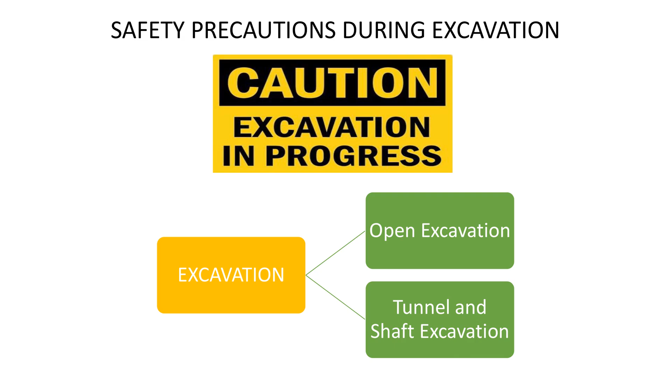The sides of every excavation where there is danger of fall or dislodgement of earth, rock or other material forming the sides or adjacent to any excavation shall be securely supported by adequately braced timber of suitable quality or other material unless the sides of the excavation are sloping to a safe angle.

No excavation of earthwork below the level of any foundation of a building or structure shall be commenced or continued unless adequate steps are taken to prevent danger to any person from collapse of the structure or fall of any part thereof.

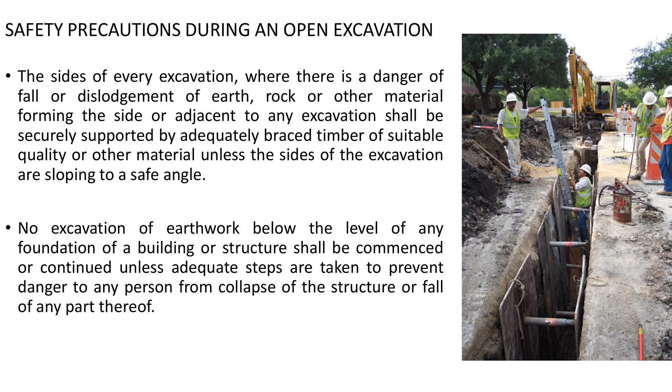In every excavation work along sloping ground, sides and slopes of excavation shall be maintained in a safe condition by scaling, benching or barricading. On steep slopes, workers shall not be permitted to work one above the other. Additional precautions are to be taken to prevent slides, slips or cavings when excavations are made in locations subject to vibrations from railroad or highway traffic, etc.

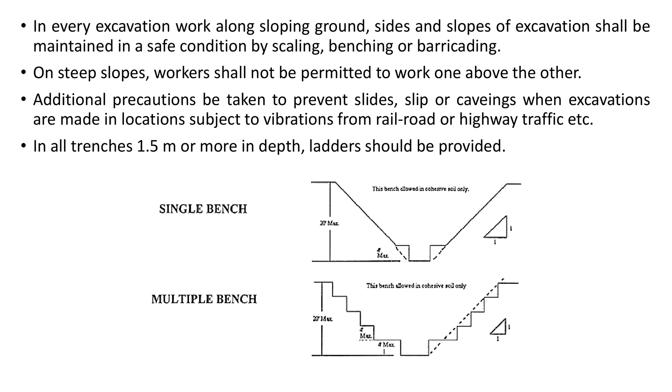For all trenches 1.5 meters or more in depth, ladders should be provided. Excavation areas should be adequately lighted for night work. During hours of darkness, all public sidewalks should be adequately illuminated and warning lights about excavation should be provided. A flagman should be posted to warn the public or approaching trucks and to direct the trucks in and out of the site of excavation.

The side slopes and their stability should be carefully examined after every blasting operation. For every accessible part of an excavation, pit or opening in the ground into which a person is liable to fall, a suitable barrier should be provided. Measures should be taken to prevent workers and spectators from approaching the dangerous areas.

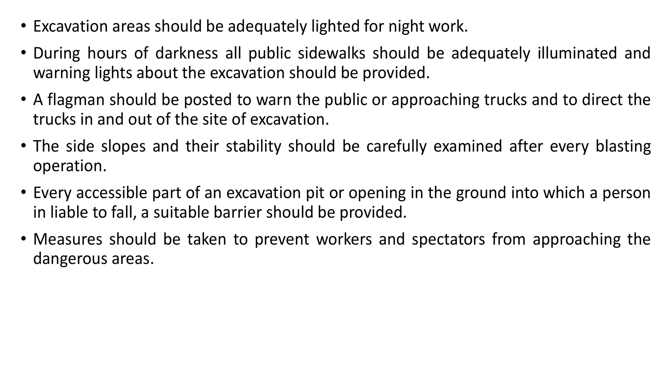Now we will look into some of the safety precautions that have to be taken during tunnel and shaft excavation. Frequent careful inspection of tunnel walls and roof and thorough scaling or removal of loose rock are necessary to prevent rock falls. Ample illumination, good housekeeping and safe walkways are important factors in the prevention of accidents. All persons working in or entering the tunnel should wear hard hats and hard toe shoes.

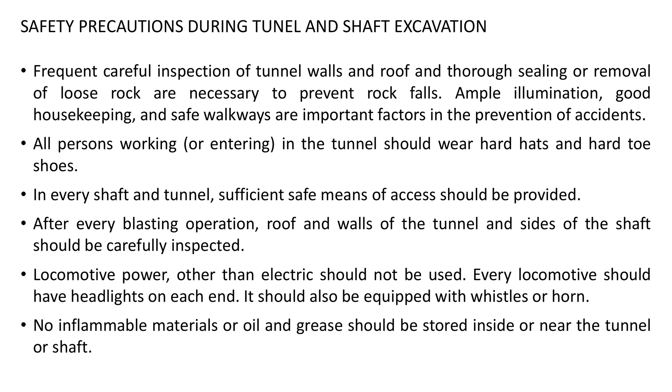In every shaft and tunnel, sufficient safe means of access should be provided. After every blasting operation, the roof and walls of the tunnel and sides of the shaft should be carefully inspected. Locomotive power other than electric should not be used. Every locomotive should have headlights on each end. It should also be equipped with whistles or a horn. No inflammable material or oil and grease should be stored inside or near the tunnel or shaft. The ventilation system should be adequate to maintain circulation of air in all parts of tunnels and shafts.

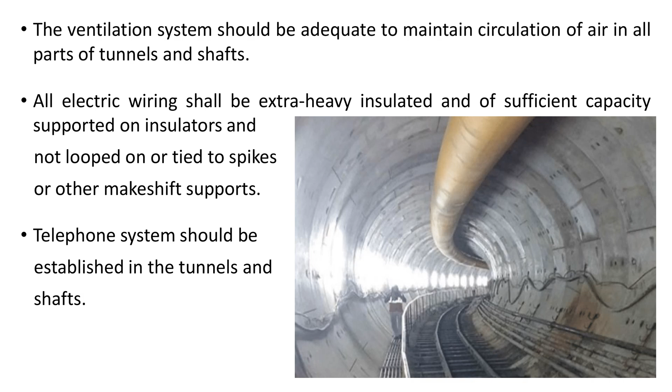All electric wiring shall be extra heavy insulated and of sufficient capacity, supported on insulators and not looped on or tied to spikes or other makeshift supports. A telephone system should be established in the tunnels and shafts. So this is an example of a tunnel opening where we can see the air being pumped inside through the yellow pipes for proper ventilation and cooling inside the tunnel.

Now we will look into some of the safety precautions that have to be taken during gaseous tunnel excavation. Regular checking of methane gas by methane detector. No entry for workers carrying lighters, matchboxes, etc. inside the tunnel. To detect carbon dioxide formation, safety lamps should be provided. The gas percentage should be checked regularly. Rescue apparatus shall be provided and some personnel should be trained to handle them. Welding and cutting by gas should not be allowed inside a gaseous tunnel.

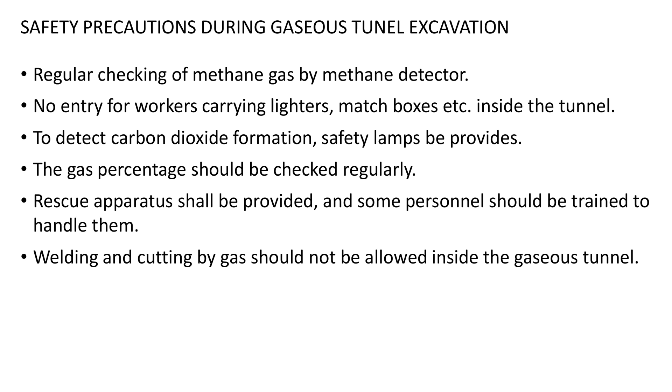Now, we will look into some of the safety precautions that have to be taken during drilling and blasting operations. We basically have 5 steps that have to be followed during drilling and blasting. They are safety during transportation of explosives, safety during storage of explosives, safety during drilling, safety during loading of explosives, and finally safety during the blasting operation. Now we will look into the safety precautions that have to be taken during each one of these steps.

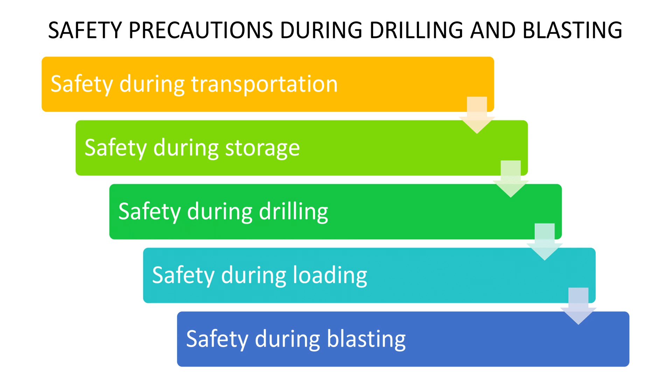Safety precautions taken during transportation of explosives. Vehicles must have springs under the body. Detonators and igniters must not be carried in the same vehicle with explosives. The vehicle carrying the explosives must not be used to transport workmen or other materials. Driver should not leave the vehicle unattended.

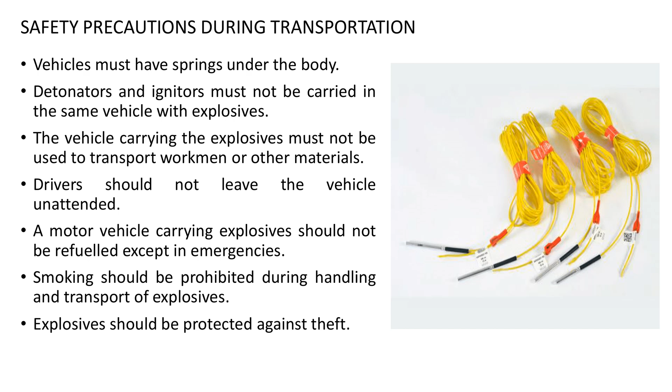A motor vehicle carrying explosives should not be refueled except in emergencies. Smoking should be prohibited during handling and transportation of explosives, and explosives should be protected against theft. All vehicles transporting explosives shall be marked or placarded on both sides and ends with the word explosives in white letters not less than 75 mm tall on a red background.

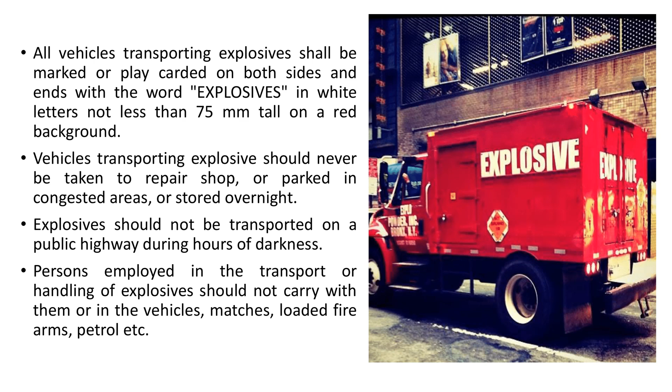Vehicles transporting explosives should never be taken to a repair shop or parked in congested areas or stored overnight. Explosives should not be transported on a public highway during hours of darkness. Persons employed in the transport or handling of explosives should not carry with them or in the vehicles items such as matches, loaded firearms, petrol, etc.

Now we will look into some of the safety precautions that have to be taken during storage of explosives. The place where explosives are stored is called a magazine. The magazine should be kept clean. High explosives like dynamite should be stored in a dry, clean, well ventilated, bulletproof and fireproof building constructed in accordance with the Indian Explosives Act on an isolated, well guarded place.

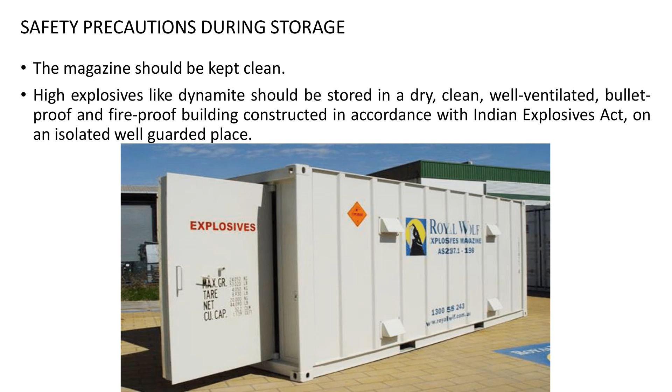A sufficient number of lightning conductors should be provided on top of the magazine. Separate magazine shoes without nails should be kept in the magazine, and persons entering the magazine must put on these magazine shoes. Light should be obtained from an electric storage battery lantern. No person having articles of steel or iron should be allowed to enter the magazine.

Oily cotton rags, cotton waste, and other articles liable to spontaneous ignition should not be taken into the magazine. Packages containing explosives should not be allowed to remain in the sun, and adequate firefighting equipment shall be provided in the magazine.

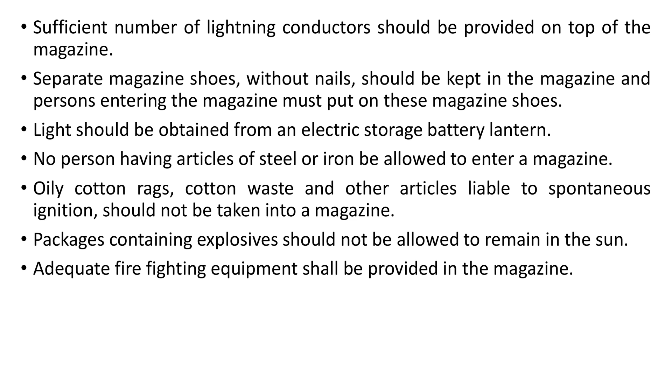Safety precautions during the drilling operation. Holes should be of greater diameter than the diameter of the cartridges of explosives. Loading and drilling should not be carried out at the same time in the same area. Drilling should not be resumed after blasts have been fired until thorough examination has been made to make sure that there are no unexploded charges which the drill might strike.

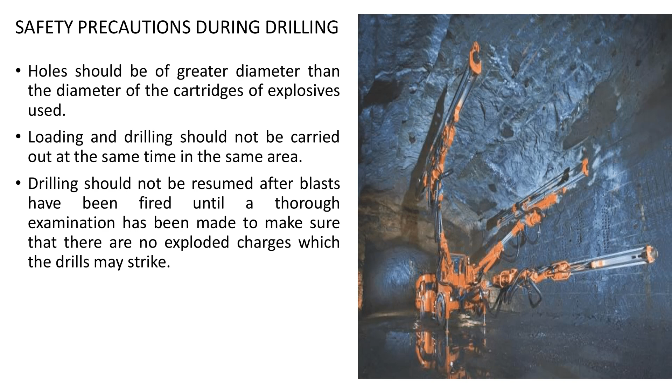Now let us look into the safety precautions taken during the loading of explosives. Boreholes must be cleared of all debris before the cartridge is inserted. All loaded holes or charges shall be checked and definitely located before firing. Holes in the cartridges shall be made with a sharpened wooden stick. Detonators shall be inserted only in a hole at the end of the cartridge prepared specially for that purpose.

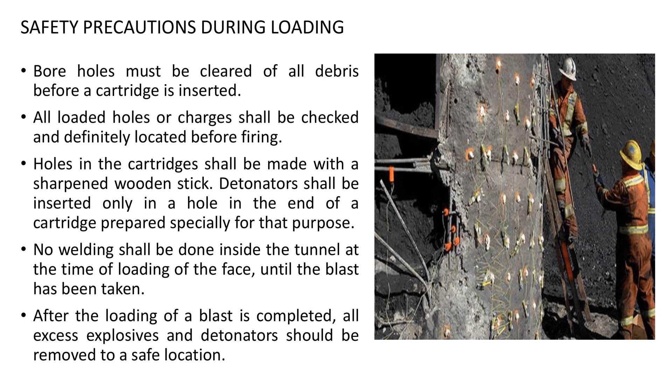No welding shall be done inside the tunnel at the time of loading of the face until the blast has been taken. After the loading of a blast is completed, all excess explosives and detonators should be removed to a safe location.

Now we will look into the safety precautions taken during the blasting operation. The charge should be fired successively and not simultaneously. Prior to the firing, all persons in the area should be warned of the blast and sent to a safe distance. Flagmen with whistles should be posted to stop traffic at access points on each possible route of travel. Blasting should be done at fixed hours and displayed on a notice board.

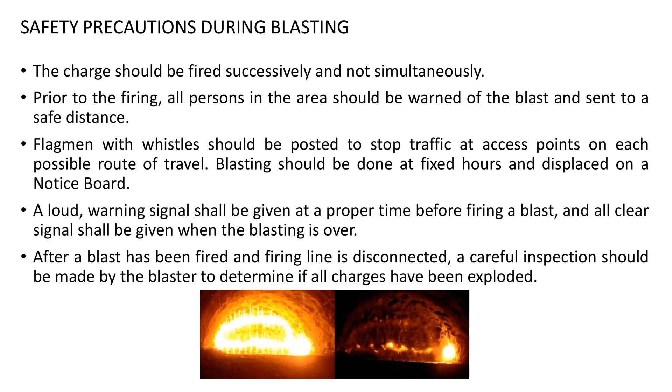A loud warning signal shall be given at a proper time before firing a blast, and all clear signals shall be given when the blasting is over. After a blast has been fired and the firing line is disconnected, a careful inspection should be made by the blaster to determine if all charges have been exploded.

Now we will look into some of the safety precautions that have to be taken during hot bituminous works. Workers shall use protective wear such as boots, gloves, goggles, helmets, safety jackets, etc. When heating and handling of hot bituminous materials is to be done in the open, sufficient stocks of clean dry sand or loose earth shall be made available at the work site to cope with any resultant fires.

When heating of bituminous material is carried out in enclosed spaces, a sufficient number of properly maintained dry powder fire extinguishers or foam extinguishers conforming to accepted standards shall be kept in readiness on the work site. Piping for hot tar and bitumen shall be adequately insulated to protect workers from injury by burns. Workers shall not stand facing the wind direction while spraying hot binder, as it may fall on them causing burns.

Suitable indicator gauges shall be used to check the level and temperature of the material in the boiler. Workers should not be allowed to peep into the boiler.

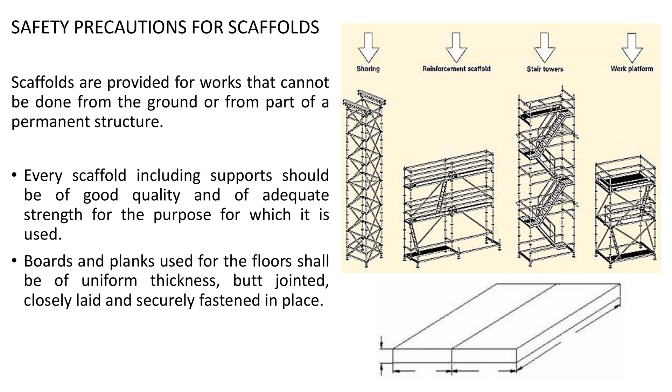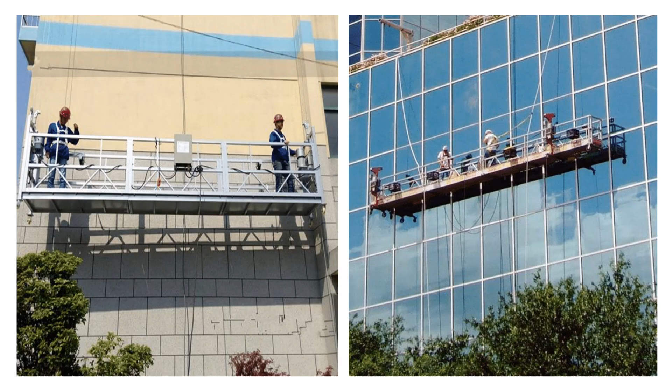In case of suspended scaffolds, supports should be of adequate length and strength. Ropes, chains, or other means of suspension should be of good quality, sound material, and of adequate strength and properly secured. Persons should not be allowed to work from scaffolds during storms or high winds. Side screens should be provided on scaffolds erected along passageways. So these are a couple of images showing suspended scaffolds, usually used for cleaning of glass, painting and plastering purposes.

Now we will look into some of the safety precautions that have to be taken for platforms. Platforms are provided on top of scaffolds, which act as a leveled surface for the workers. All working platforms from which workers are liable to fall more than 2 meters should be of adequate width, depending upon the type of work done, and provided with suitable guardrails of adequate strength. Platforms should be kept free from any unnecessary obstruction, material, rubbish, etc.

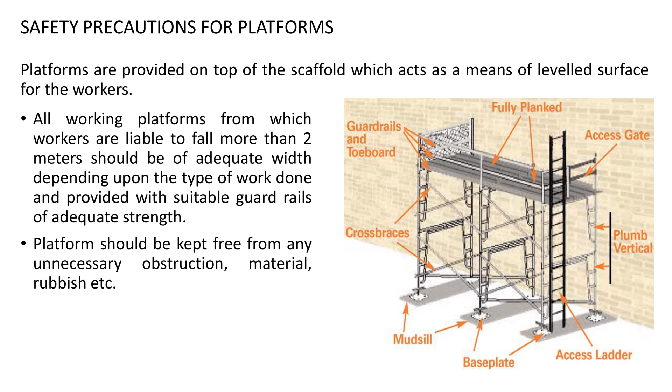Each supporting member used in the construction of platforms should be securely fastened and braced. Supporting members should be placed on a firm, rigid, and smooth foundation of a nature that will prevent lateral displacement. Cantilevering of scaffold planks should be avoided. Where planks are butt jointed, two parallel putlogs must be used, giving each plank sufficient support.

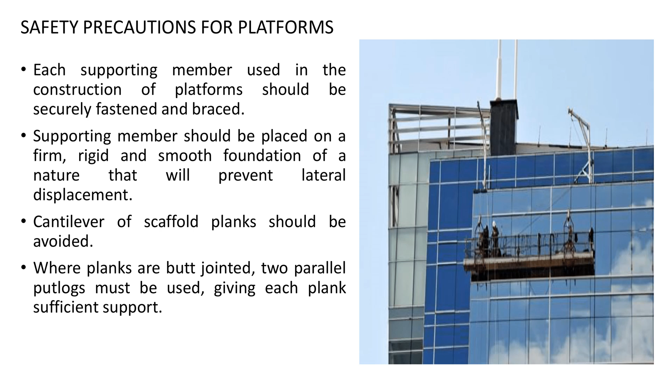Now we will look into some of the safety precautions that have to be taken while using ladders. Ladders should be of good construction, sound material and adequate strength. No ladder with a defective or missing rung, or with any rung which depends for support solely on nails, spikes, etc., should be used. Wooden ladders should not be painted, as paint covers up the defects. Whenever a platform is 1.5 meters or more above the ground, a ladder or stairway should be provided. Every ladder used for a vertical height of more than 9 meters should be provided with an intermediate landing.

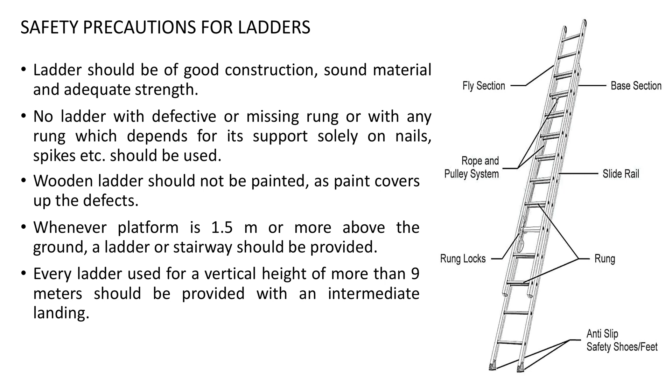The materials and tools should, wherever practicable, be pulled up with a rope and should not be taken up by ladders. A ladder should not be placed upon a box, barrel, or other movable insecure object. The slipping of a ladder at either end should be carefully guarded against where the supporting surfaces are smooth and vibrating. So that's it for today's session.